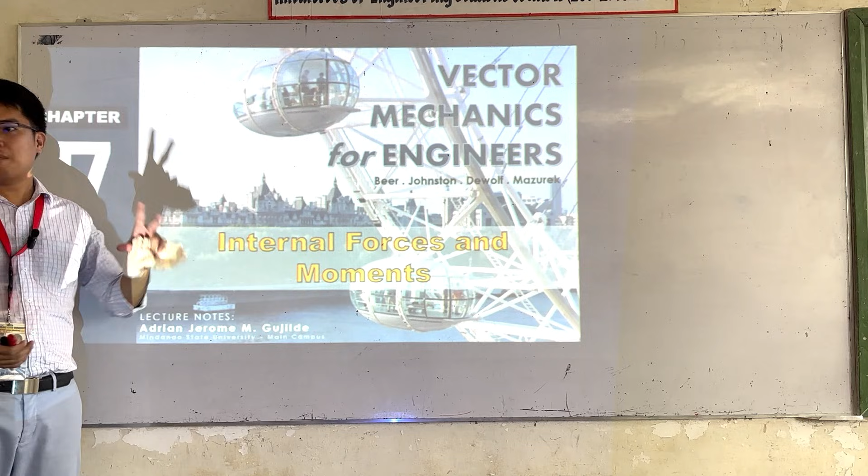So, the title for chapter 7 is Internal Forces and Moments. So, ano yung kaibahan ng chapter na to sa ibang mga chapters na diniscuss natin previously, no? So, for chapters 2, 3, 4, and 5, and chapter 6 last ganina, no?

So, yung chapters 2 to 5, ano yung mga sinolve natin doon? Mga external forces, no? So, ano yung mga external forces na yon? Yung mga reactions at the support, yung mga reactions sa cables natin. So, yan yung mga external forces. So, forces outside our system.

Now, proceed tayo sa chapter 6. Ano yung sinolve natin sa chapter 6? Internal forces. So, ano yung internal forces na yon? Yung internal forces na yon, those are forces that hold together our structure. Kung tatanggalin natin yung internal force na yan, yung structure natin is ma-dismember, no?

Now, for chapter 7, we have another internal force. But ano yung kaibahan niya sa chapter 6? So sa chapter 6, we have forces that hold together our structure. Dito sa chapter 7, tanggalin natin sa structure yung isang member and then i-analyze natin yung member itself. Ano yung mga internal forces ng isang individual member, no?

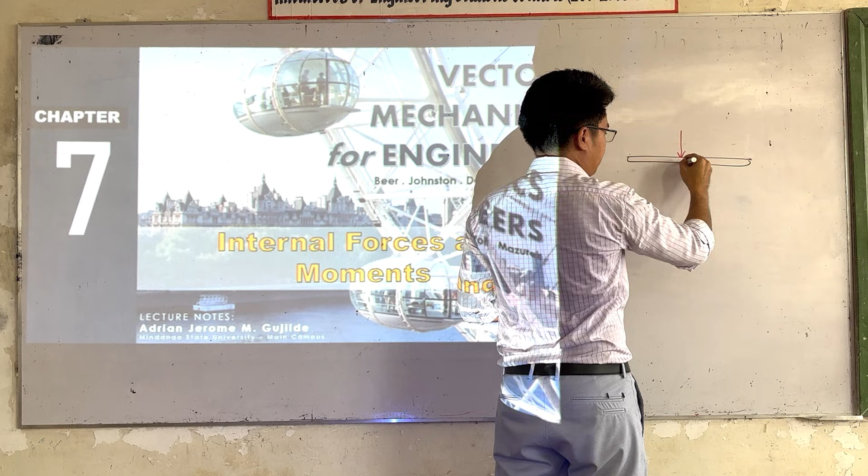That is what we term as the shearing force. So yung gunting natin, yan yung principle ng gunting. Yung gunting natin is i-cut niya. Kung makikita nyo, yung gunting natin is merong dito na side, saka dito na side. Kung applyan mo ng force, ano yung mangyayari? Ma-cut in two. So another term for malaking gunting is shear. Big scissor. English ng big scissor is shear, no?

Now how about kung mag-apply ako ng force papunta dito, papunta doon, and papunta dito, ano yung mangyayari sa beam natin? So yung beam natin, ito yung result, mabibend. So kung mabibend yan, internally, meron siyang nararamdaman na tinatawag natin bending moment. So that internal bending moment, yan yung makakapag-cause sa material natin or sa member natin to bend.

So dalawa yung i-analyze natin dito: the bending moment, and the shearing forces. So yung gagawin natin sa chapter na to is to graph at every point ng beam natin, ano kaya yung shearing at bending moment at that point. So dito, iba yung bending at saka shearing. Dito din, iba. Iba din yung dito. So every point dyan, iba-iba.

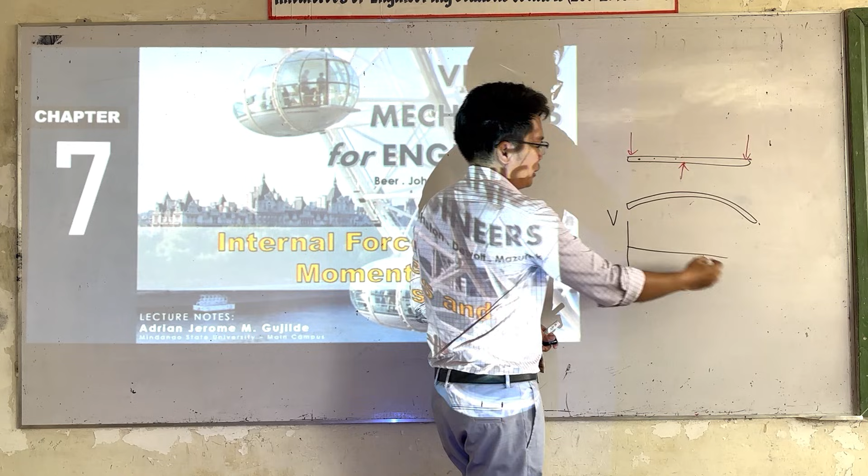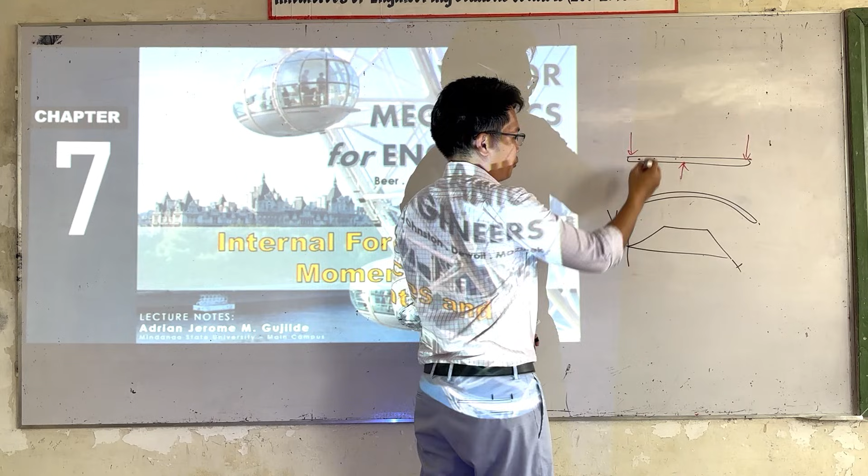So ano yung gagawin natin dito? Gagawa tayo ng graph na tinatawag nating shear and moment diagram. So sa shear and moment diagram, for example, ito yung shear, ito yung distance natin, the length of the beam. Yung shear natin, yung image niya would somehow be ganito. So, for example, at this point, gusto mong i-analyze. Kung i-reflect natin yan dito, yung shearing niya is ganito kalaki. Dito naman, ganito kalaki.

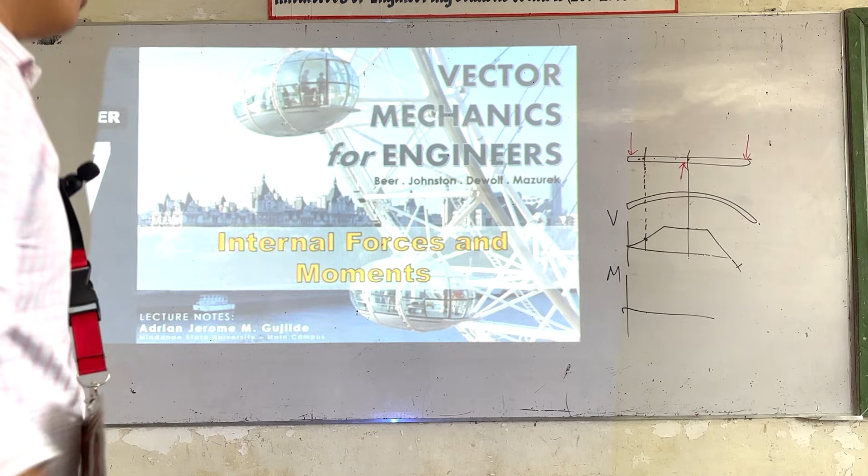So, malaki, constant, and then lumiit. So, ito yung gagawin natin dito, the shear and the moment diagram. So, at every point of our beam, ano kaya yung shearing force at saka bending moment na nararamdaman niya. Sa chapter na to, meron tayong dalawang approach. One is yung graphical approach, and then yung isa is i-calculate talaga natin isa-isa. So, sige, proceed tayo. Mabilisan lang to, introduction lang pala yun.

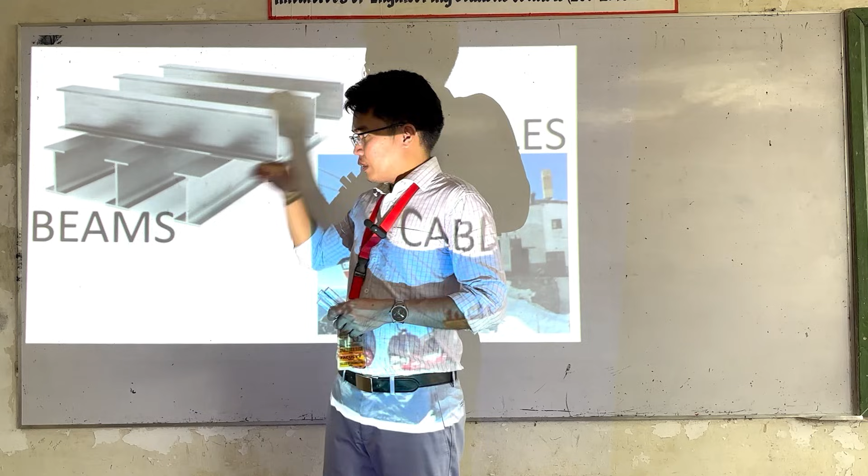So, sa chapter din na to, yung hahanapan natin ng internal forces sa every member is yung structure ng mga beams at saka cables involved. So since sa ENS 161 natin, yung topic ng cables is optional, yung kasali lang sa syllabus natin is yung beams, dito lang tayo mag-e-end. So yung chapter 7 natin is half lang i-discuss natin, only for the beams, kasi ito is optional. Okay? So sige.

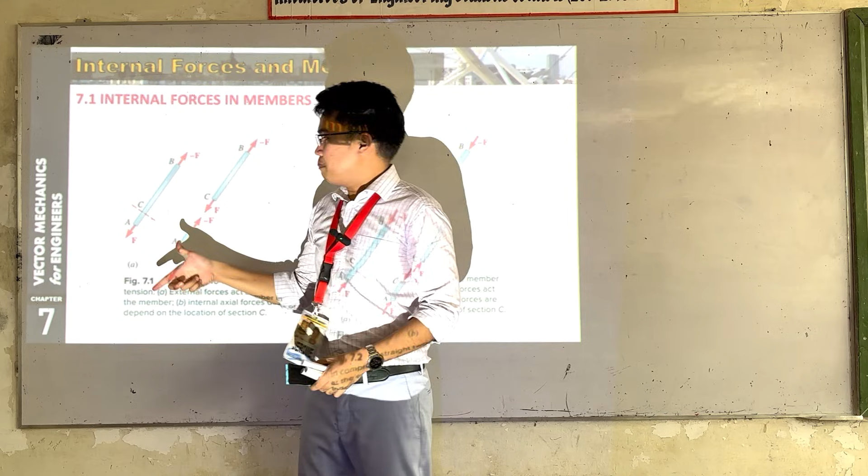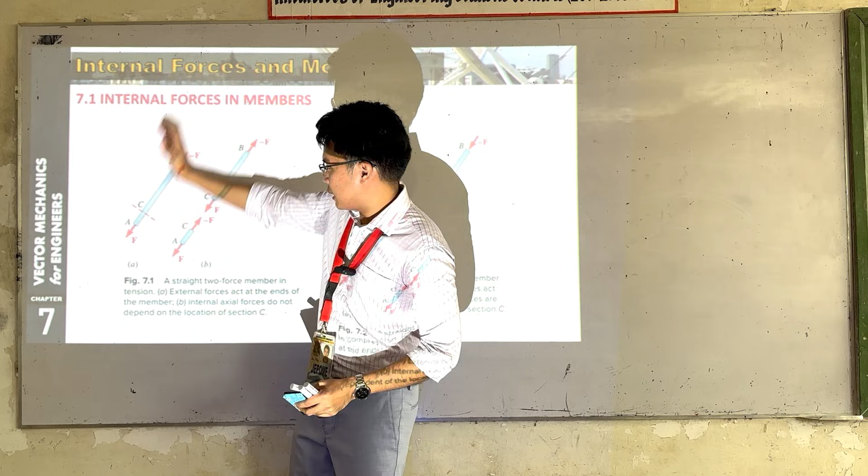Now, dito muna tayo sa concept, no? If we have a member here, a two-force member AB, and then i-cut natin sa section C. Ayan, sa pag-cut natin sa section C, kung tatanggalin natin to, somehow, yung matitira is ito lang F, tama? Ito lang F. Pero, i-cut natin to. Ito, i-neglect natin, and then yung matitira is itong AC lang. So, yung matitirang force dito is F lang.

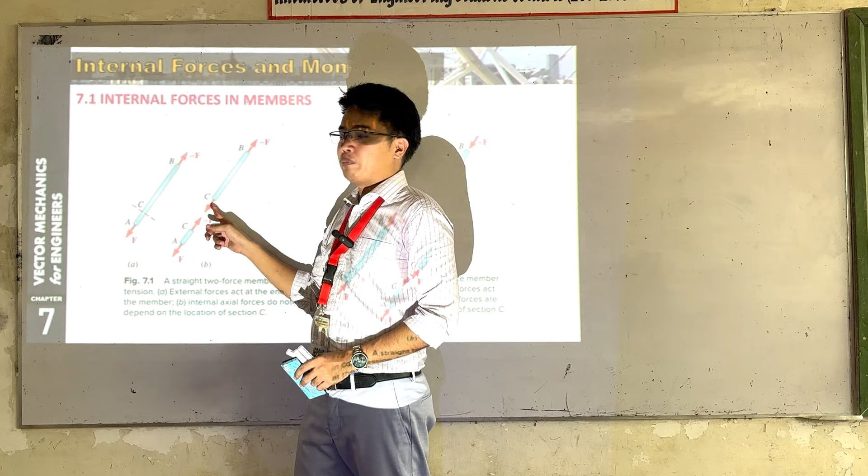But knowing that AB is in static equilibrium, there should exist an internal force that mag-o-oppose sa kanya, in order for this to be in equilibrium. So, meron tayong internal force dito na F. The same as with here. Kung ito matitira dito is ito lang F, it should be na meron tayong internal force to counter. The same magnitude but opposite in direction. Kaya yung pag-cut natin dito, itong mga forces na to, yan yung mga internal force within our member.

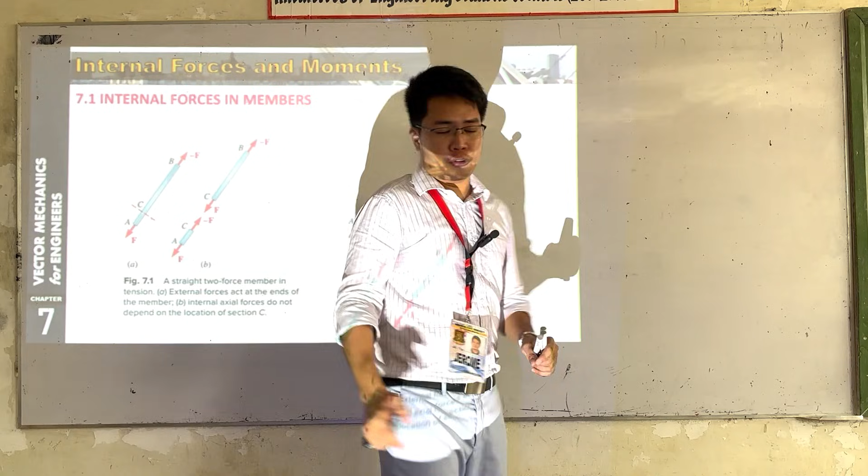So, the same pa rin, kung yung in-apply mo na force dito is tension, this one here should be in tension. Dito, if we have compression, it should be that the internal force is in compression. So, take for example, yung pinakita nating image sa chapter 6. Ito siya. So, we have here a multi-force member.

Kung i-cut natin at portion J dito, ano yung matitira sa segment natin? We have a force na papunta doon. Knowing that this multi-force member is in static equilibrium, it should be that at this point here, yung mga internal forces and moments dito should counter, para kung i-sum up natin yan, equal to 0.

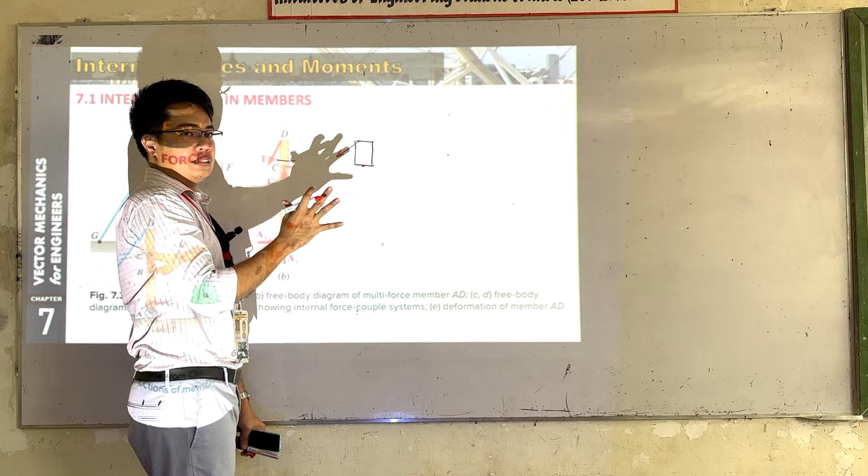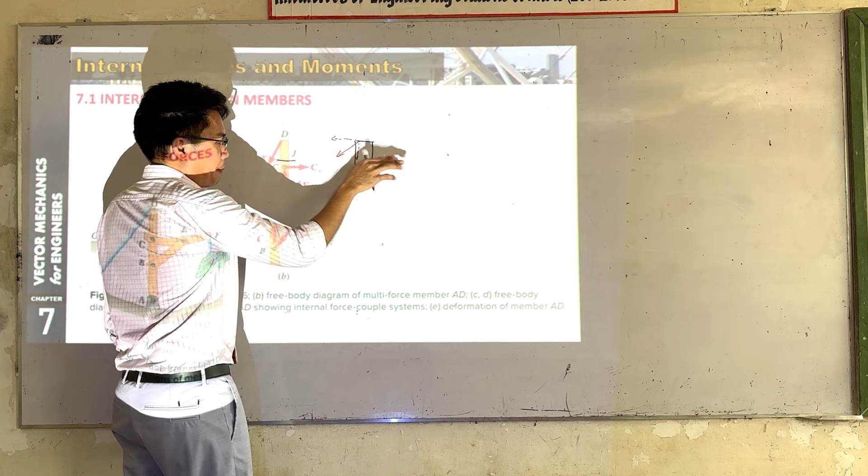So, kung ito siya is may component na papunta doon, saka papunta dito, it should be that dito din, kung may papunta doon, may papunta din doon. Kung ito may papunta downward, it should be na may papunta din upward. Now, at this point, this one here will create a moment na counterclockwise. So therefore, dapat meron din mag-counter na clockwise na moment.

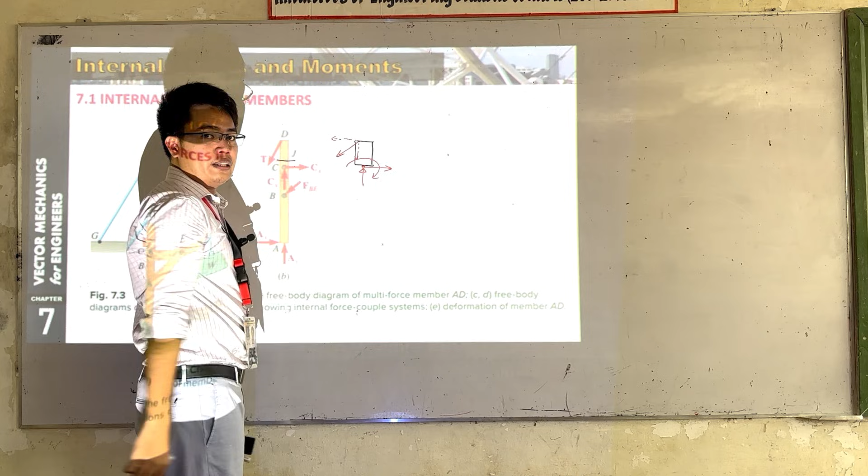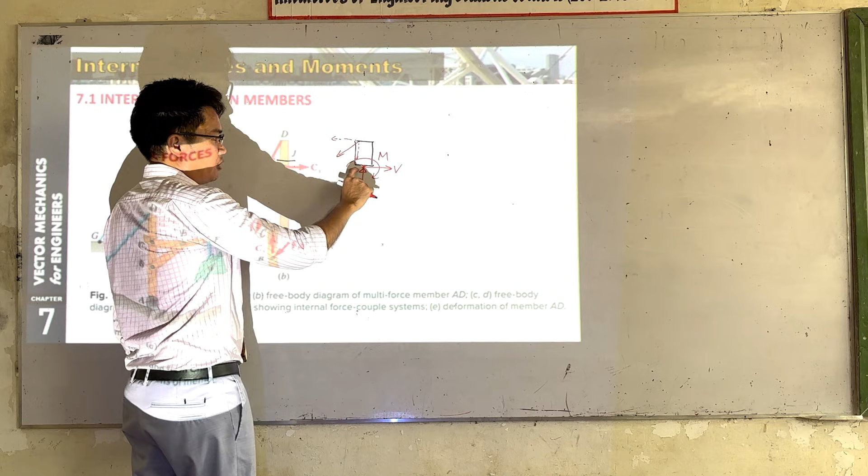So at this point here, the internal bending moment is our M. This one here naman is our shear. And ano naman dito? This one here, our force F na tinatawag nating axial force. So ito yung tatlo na hahanapin natin: the bending moment, the shearing force, and the axial force. Tinawag natin itong axial force because along siya sa axis natin.

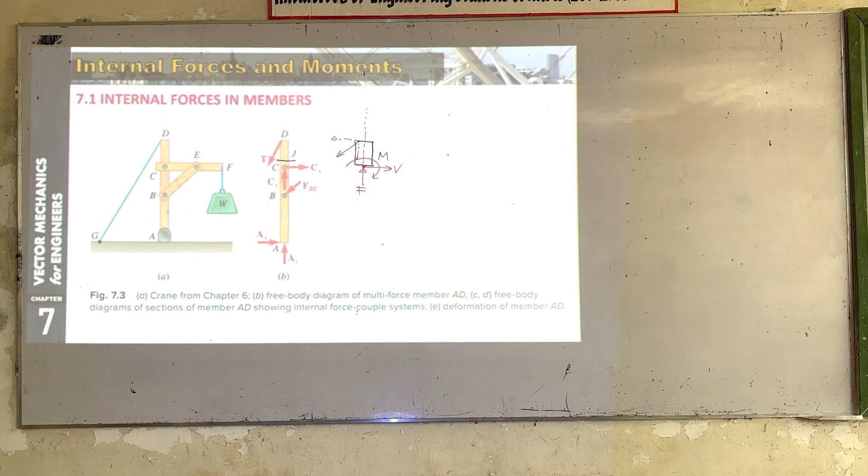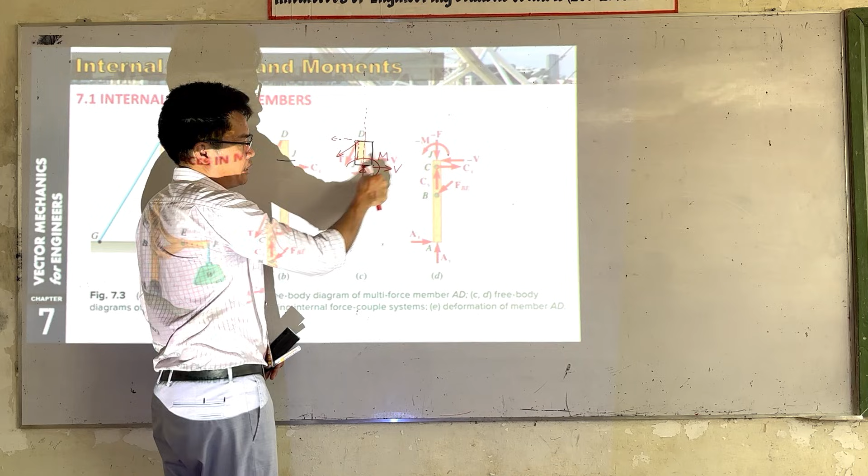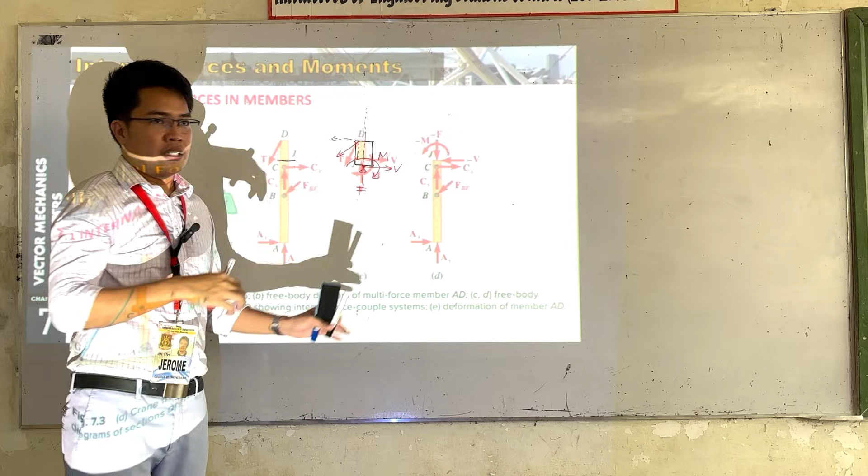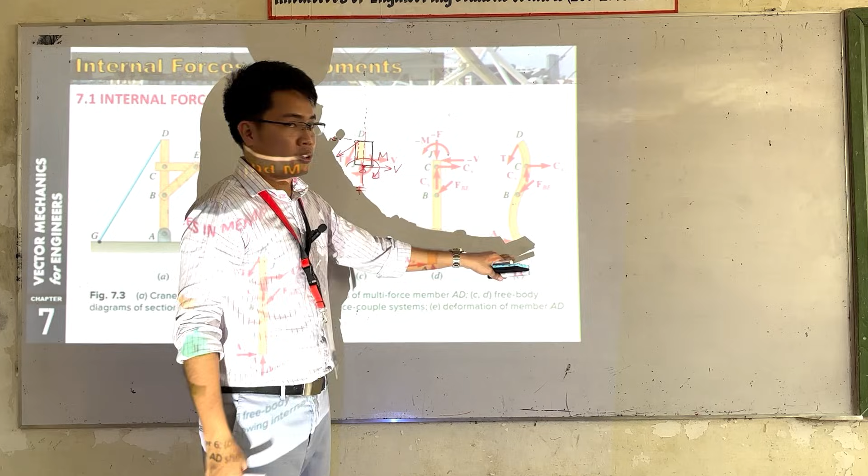So somehow, kung ipadayon pa, the same dapat din sa kalahati niya. So if we have a clockwise moment here, it should be counterclockwise dito. Kung ito siya is compression, it should be compression din dito. Kung ito siya to the right, this one here is to the left. So ayan lang yung convention natin. Now, kung i-simulate natin sa SolidWorks and then titingnan natin kung ano yung effect pag in-applyan natin ng mga internal force na ganyan, our image would look like this one.

Now, how about this one? Di ba yung two-force member natin sa previous example sa chapter 6 is just a straight line. And then, kung two-force member yan, ano yung gagawin ng forces? Compression at saka tension. Wala tayong bending at saka shearing na nagaganap dyan. Now, how about if yung two-force member natin is hindi straight, somewhat baliko? So, ano yung mangyayari?

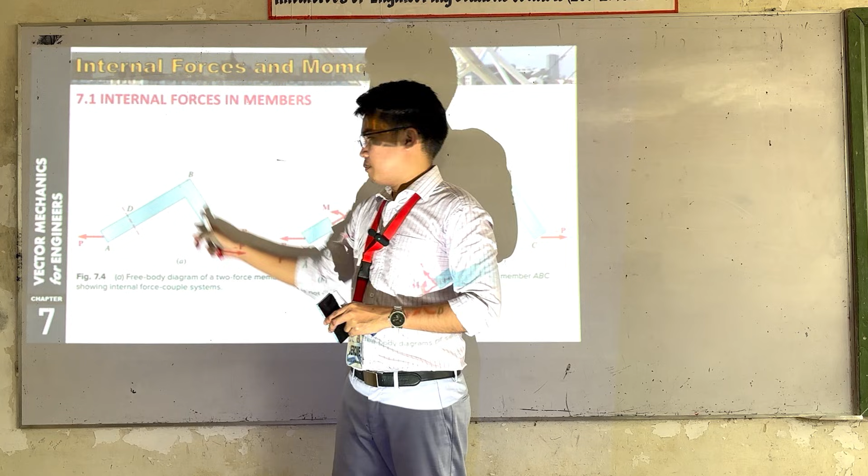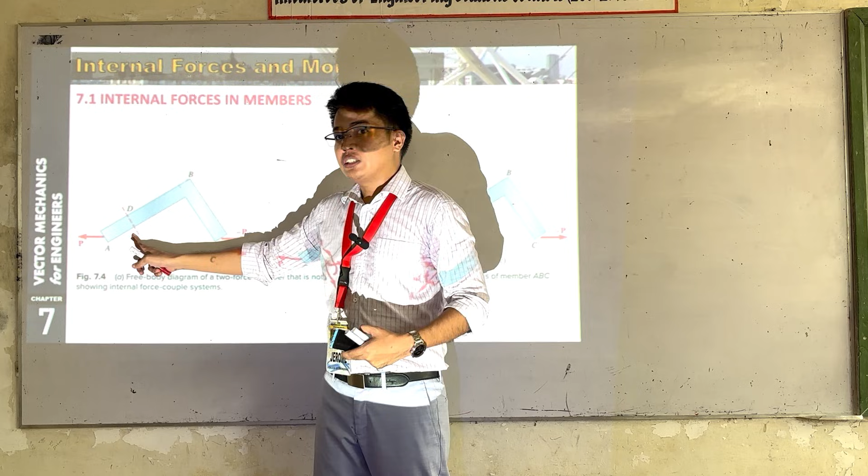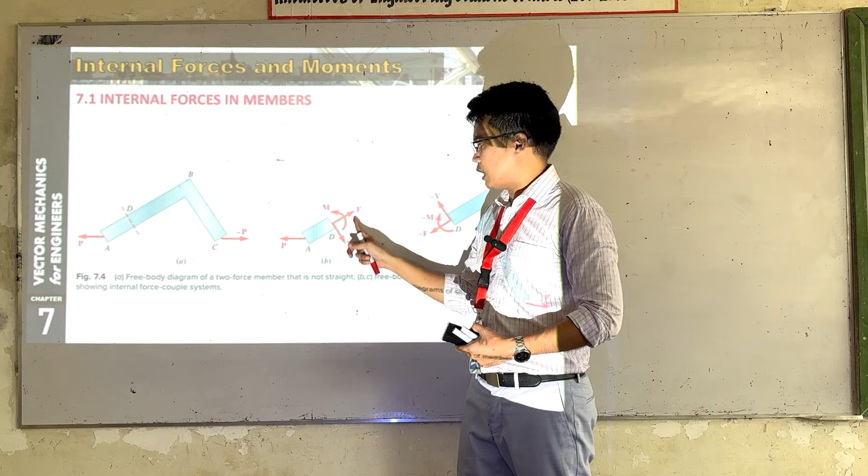Kung i-cut natin dito, yung dalawang forces dito will not cause compression and tension lang, but actually shearing at saka bending. So at this point here, i-cut natin to, ano yung mga lalabas dyan? Dapat mag-equilibrium sila. We have now a bending moment, an axial force, at saka a shearing force. So we have a two-force member, but yung member natin is not a straight member. So meron na tayong mga internal forces na bending moment at saka shearing.

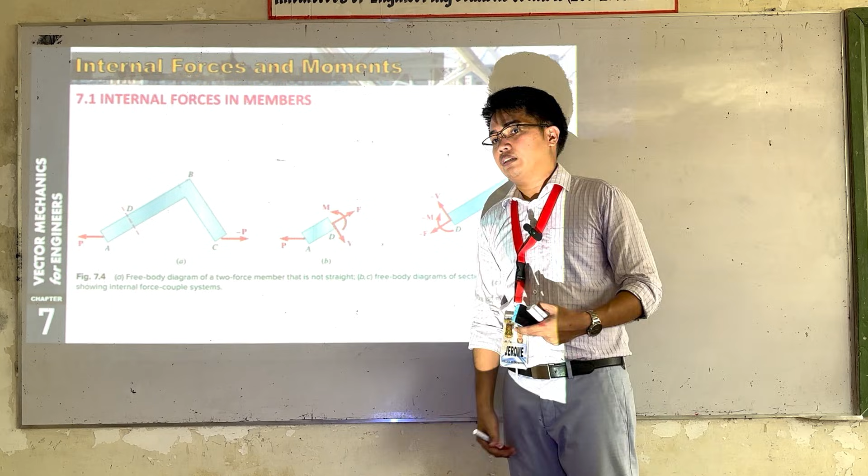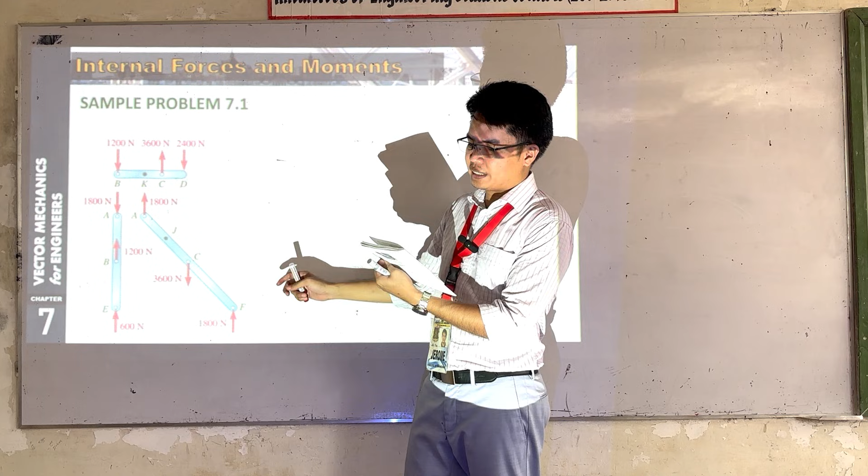Okay? So somehow, ito yung image natin. Let's have an example. So kanina, na-solve na natin to, ito yung mga nakuha nating values. No? So ano yung tanong niya dito? Gusto niya malaman, in the frame shown, determine the internal forces in members ACF at point J, in member BCD at point K. No? So ano daw yung internal force natin dito kapag hahatiin natin to?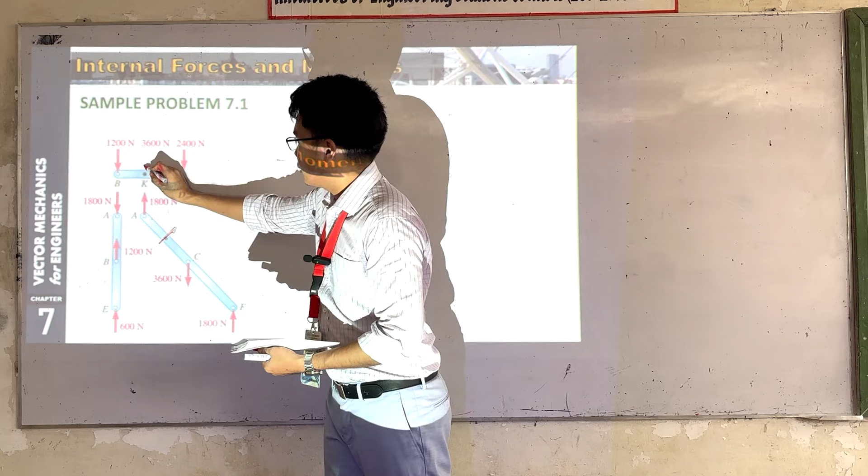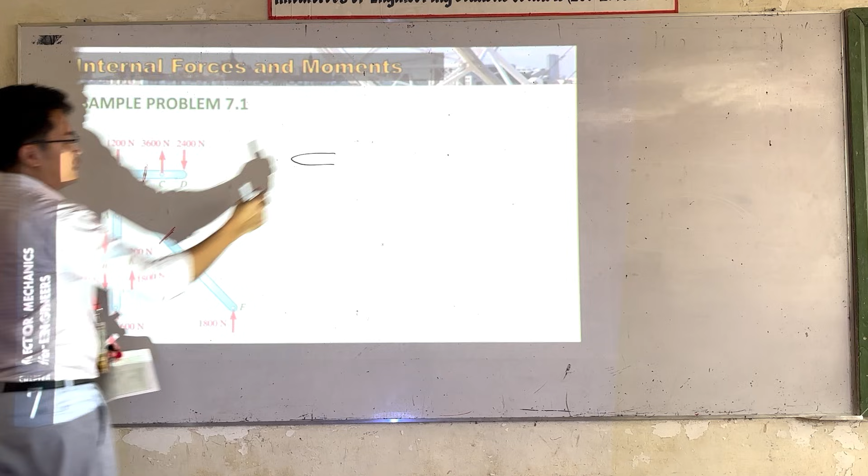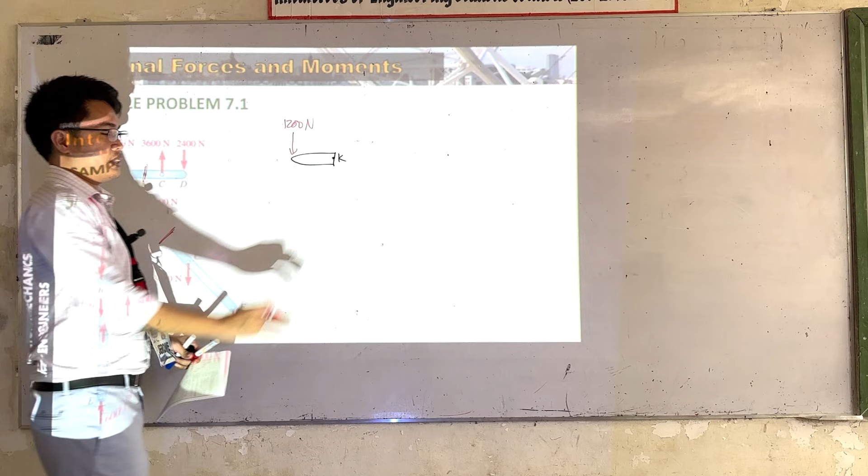And then, ito din. So paano natin yan isosolve? Siyempre, i-cut lang natin. Okay? So, pag-cut natin yan, ito muna tayo, no? This one here. So, at point K, ayan, meron tayong force na 1,200 Newton. Okay? So, ano yung mga internal forces and bending moments natin dito? So, we have shearing. Ano kaya yung shearing dito? Okay, 1,200. Automatic, no? Wala namang ibang ano dyan. How about axial? Zero. Wala tayong axial dyan.

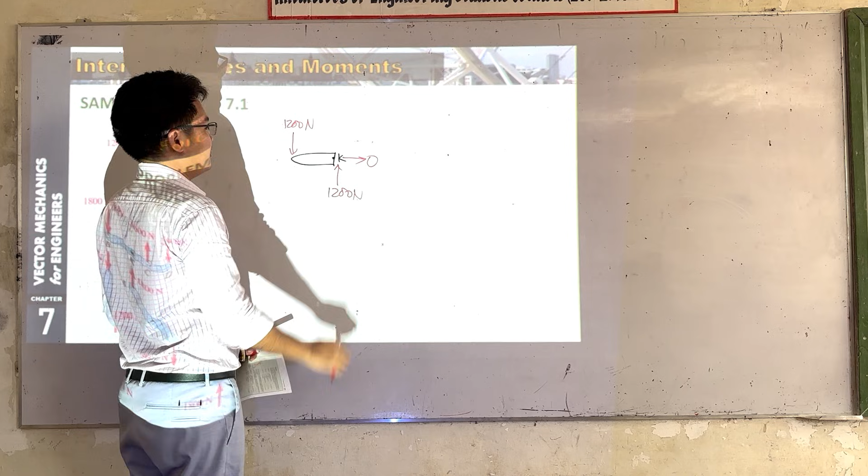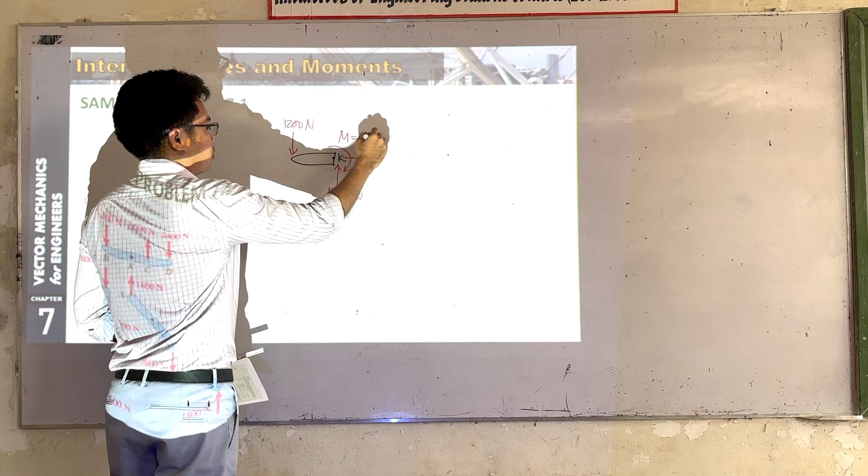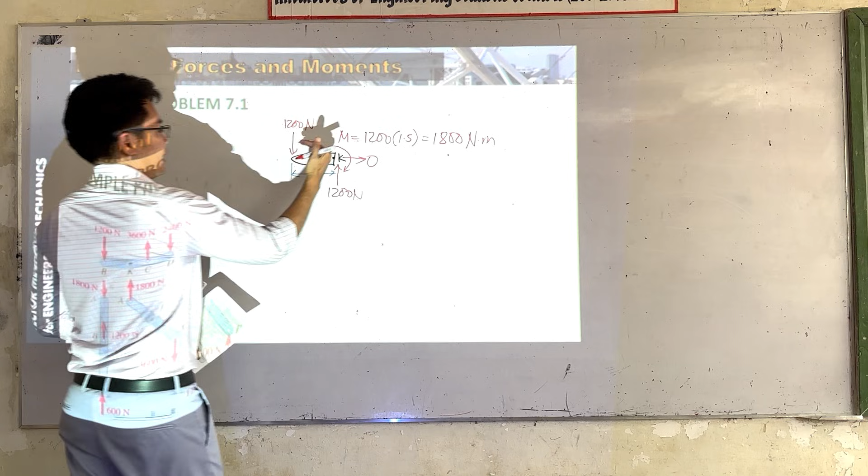No? How about bending? So at point K, this one here would tend to rotate counterclockwise. So therefore, yung moment natin dito is clockwise. So ano yung moment natin dito? This one here is 1,200 times the moment arm, which is 1.5. That is equal to 1,800 Newton meter. Ha? This one here, itong 1,200 would somehow tend to rotate na pa ganito.

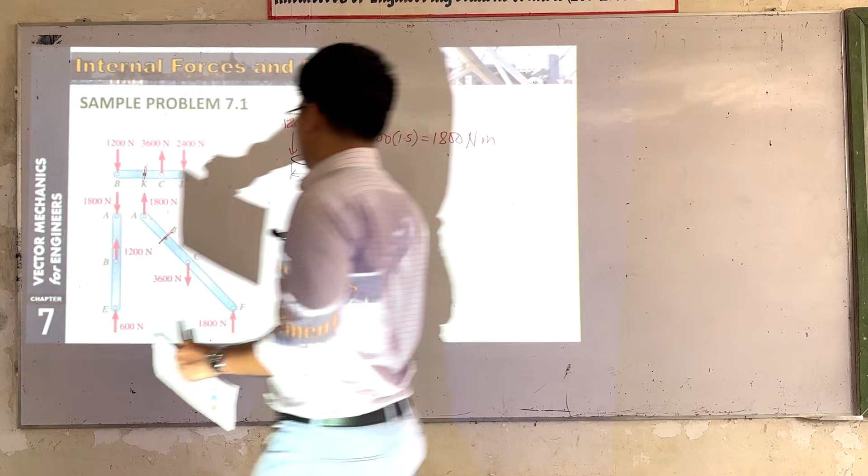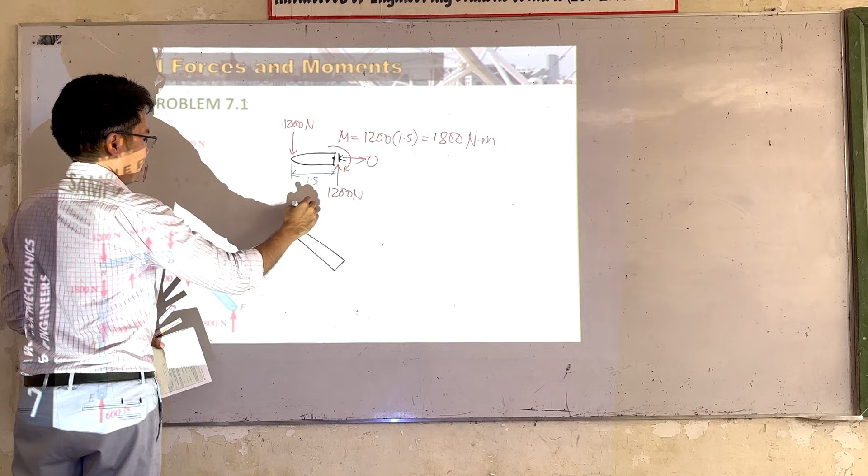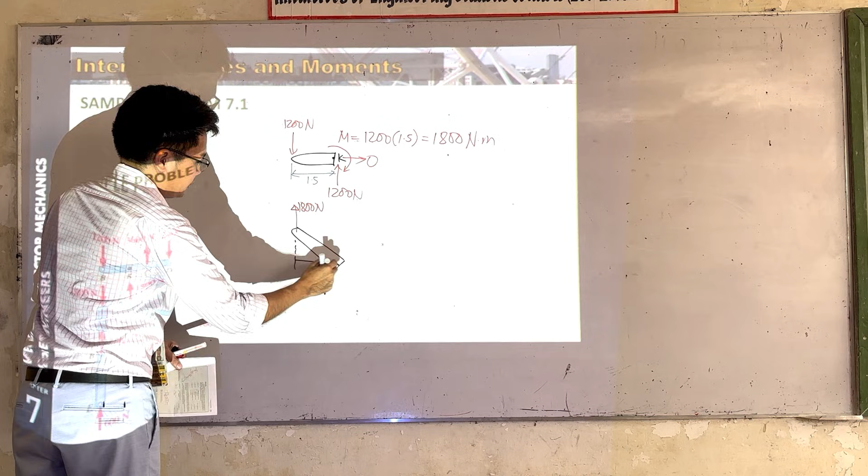Di ba? And then yung equilibrium equation natin should be ma-equal yan sa zero. No? So we have here 1,800 na papunta doon. No? In order na kung ito papunta doon, dito is kanya na. So, sige, klaro? Ayan lang, no? So the same as dito din, no? Kung hanapin natin yung J, i-cut natin dito, we have here, ayan. And then ano yung mga forces involved? We have papunta doon, 1,800 newtons. Ayan. Then ano yung distance na to? Given there. So yung distance na to daw, this one here, papunta dito, we have here as 1.2.

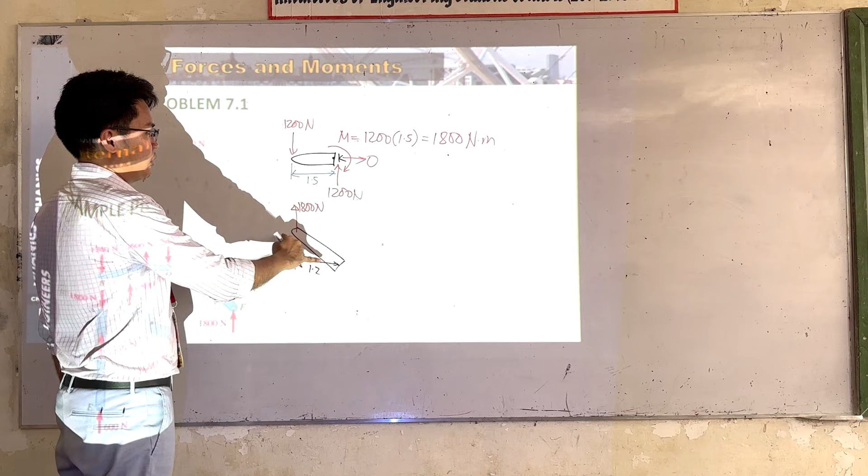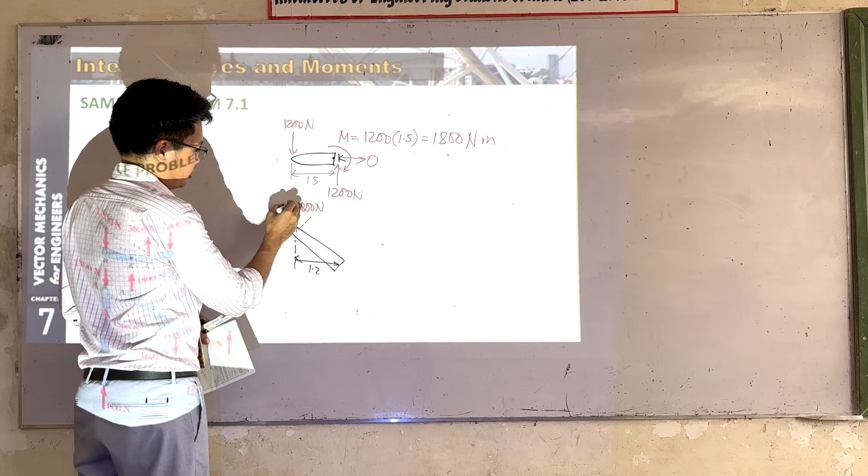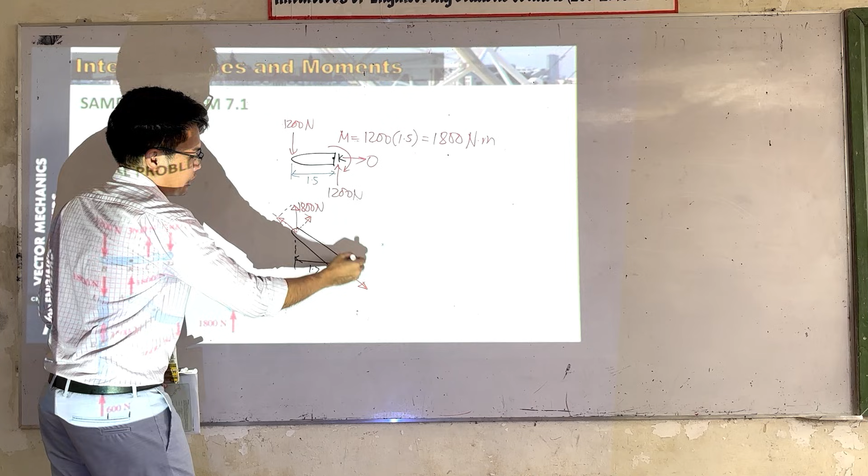So ano yung mga internal forces at saka moments natin dito? Sa palagay nyo, meron tayong axial? Wala. Meron, no? Kasi ito siya, meron tayong component na papunta doon at saka papunta dito, no? So ano yung mga component niya? Ayan at saka ayan. So kung ito siya papunta doon, yung shearing natin is papunta dapat doon. Ito siya is papunta doon, yung axial natin should be ayan. How about the moment at point here? So kung ito siya, this force here would tend to rotate clockwise, yung moment natin should be counterclockwise. Okay? So this is our V, our F, and this is our M.

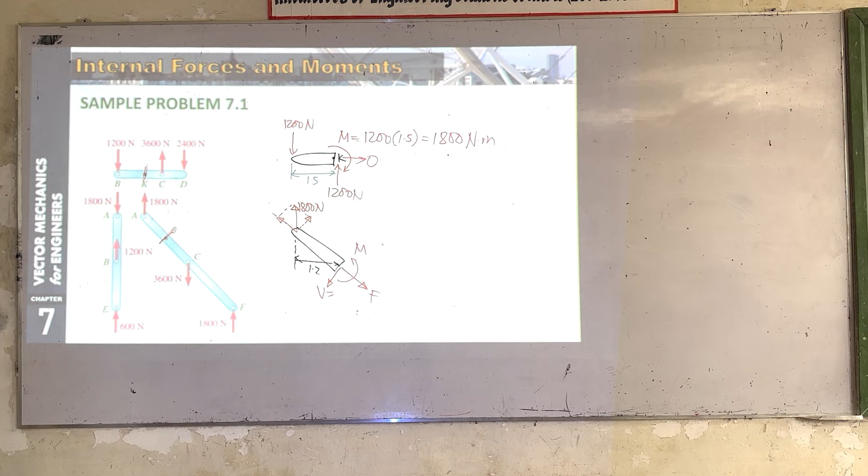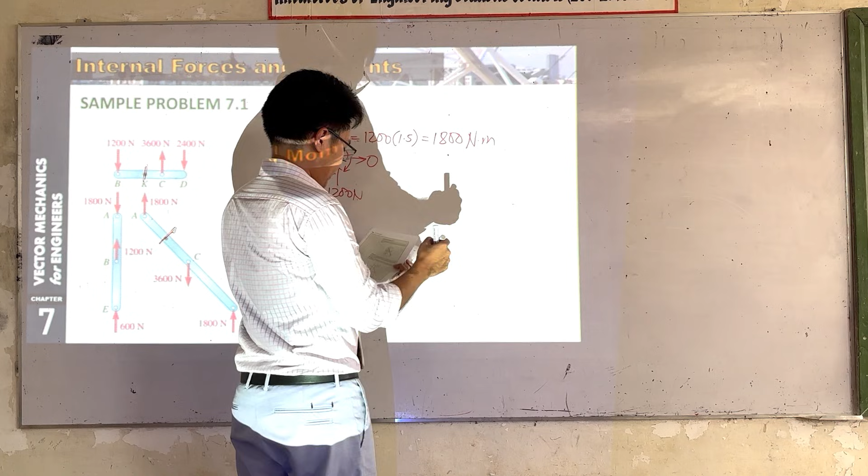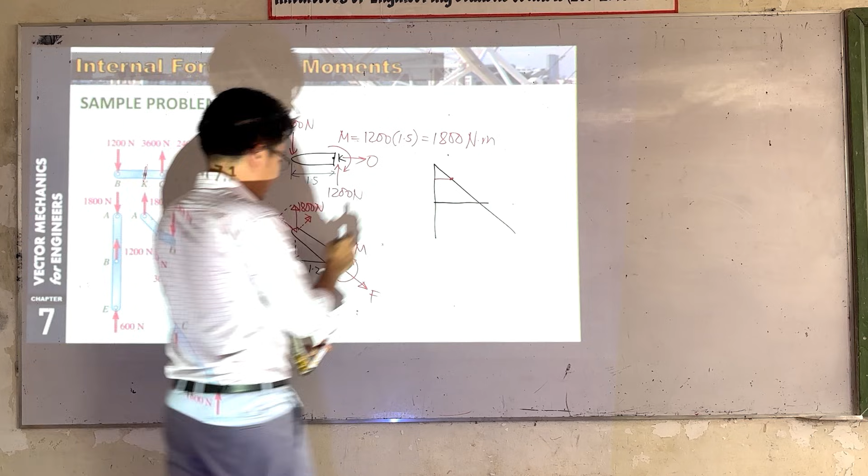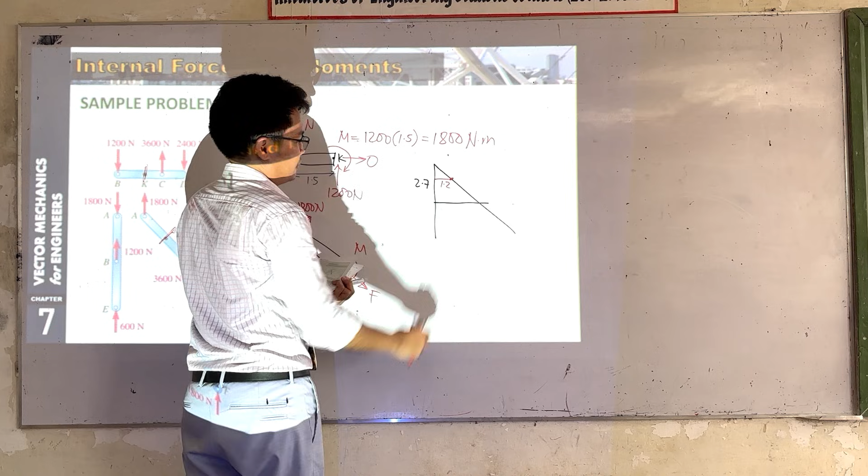So what would be the value of our V? So sige daw, ano yung value ng V natin? Hindi given yung height natin dito. Ano na lang? We have here, ito yung image natin. Ayan. Yung gusto niya dito is this point, no? Somewhere dito, no? Yung alam lang natin is this height here is 1.2. And then given sa problem that this one here is 2.7 and this one here is hindi din given. Yung given lang natin dito is this one. This is 4.8 and then this one here is 2.7.

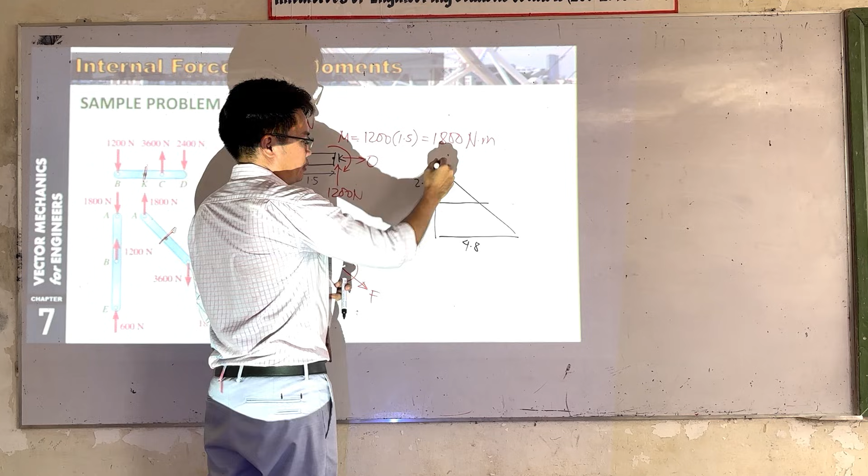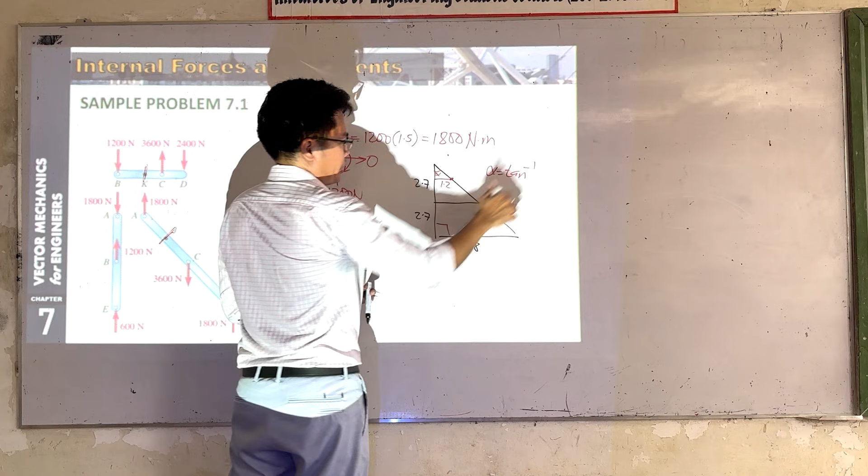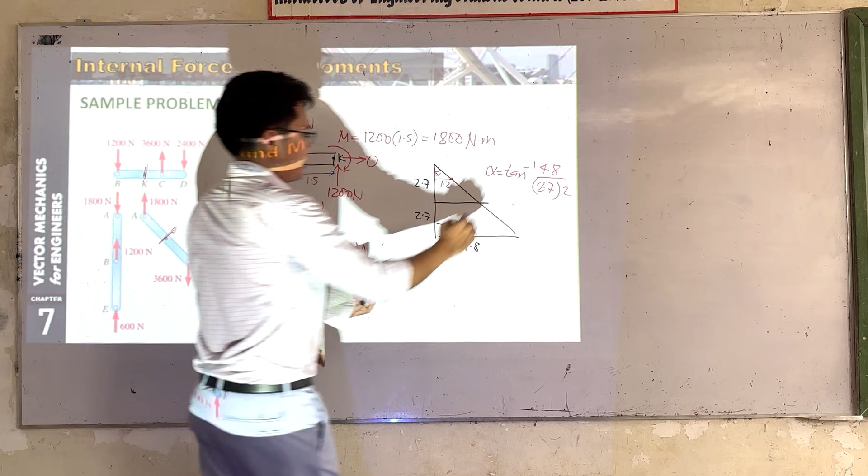So paano natin makukuha yung angle natin dito? This one here is 90. So therefore, opposite over adjacent. No? So this alpha here, alpha is just tangent inverse of opposite, which is 4.8, and then the adjacent, which is 2.7 times 2. No? 2.7 times 2. So makakakuha tayo ng alpha dito equal to 41.7. So ayan lang. So this angle pala here, ito, this is alpha. So similar siya dito. This is also alpha.

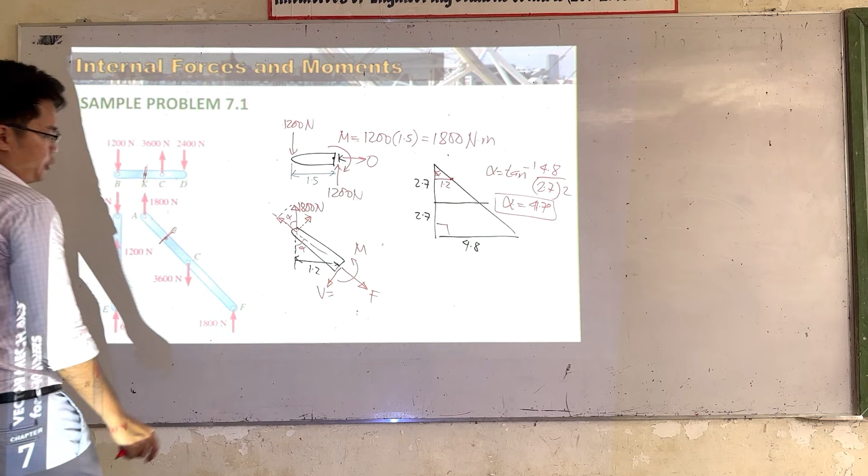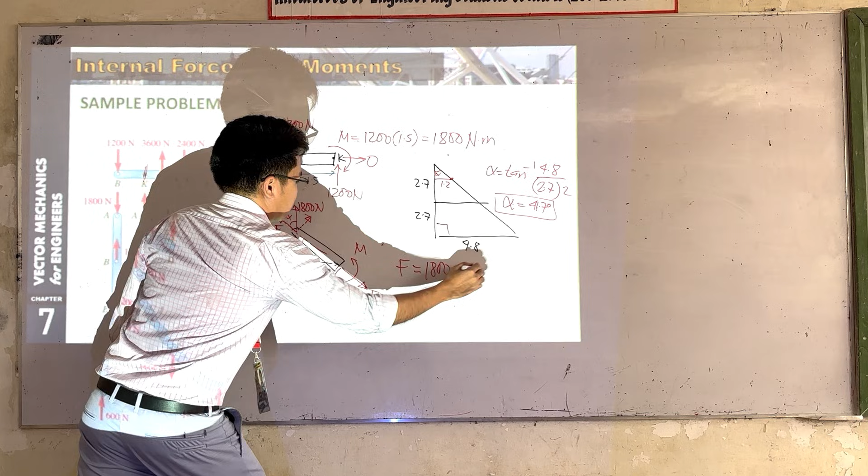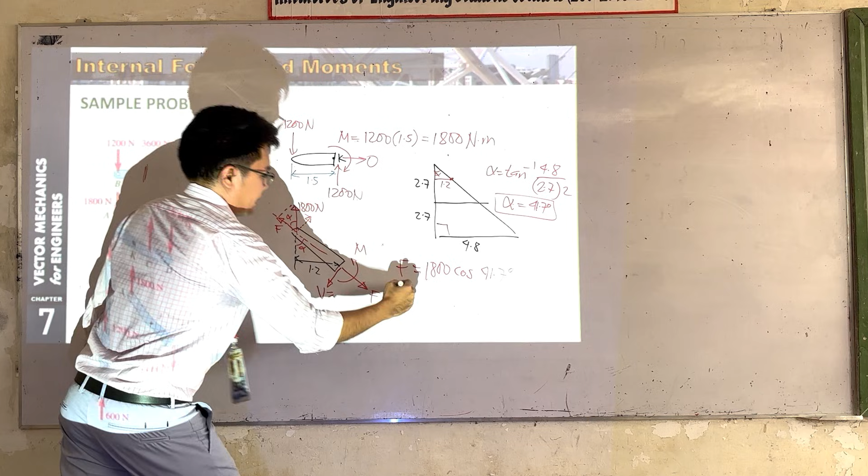So if you want to get the force here, ito siya, summation of forces, this one here, 1,800 cosine alpha. Tama? So this one here, this F, is just 1,800 cosine 41.7. And then this naman, itong shear natin dito, which is equal in magnitude here, this is V is equal to 1,800 sine 41.7.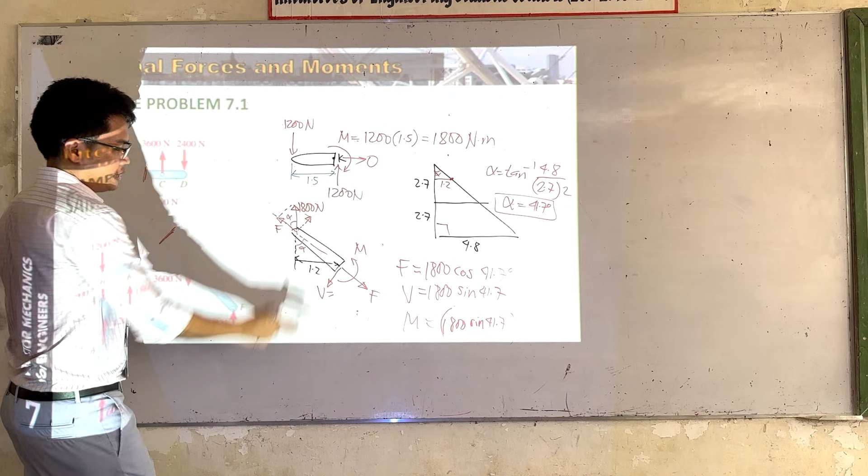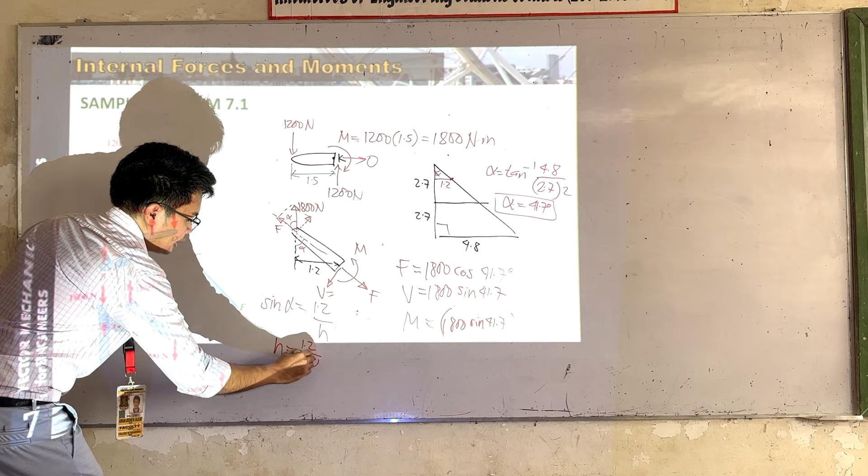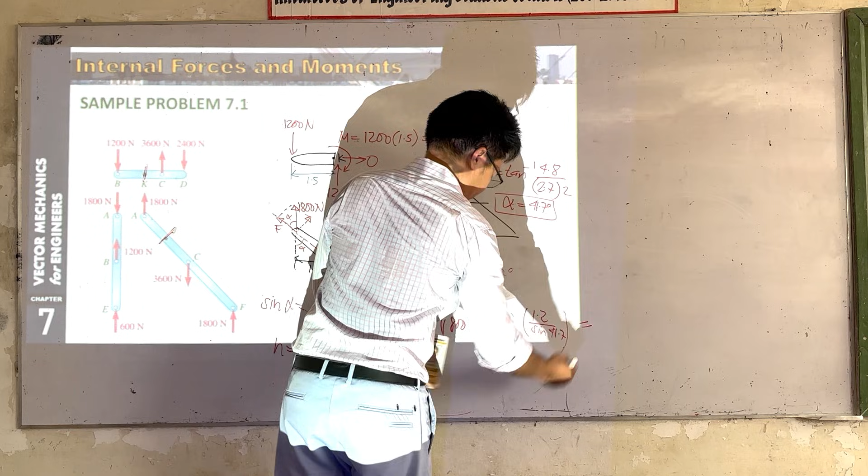How about the moment? Moment natin dito, we have this one, 1,800 sine 41.7 times the distance. Ano yung distance natin dito? Cosine, no? Ay, hindi, sine pala. We have here sine alpha is equal to opposite, which is 1.2, over the hypotenuse, which is h. So h is just 1.2 over sine alpha. So the moment arm here is 1.2 over sine 41.7. Okay? So the moment is 2,160 Newton meter.